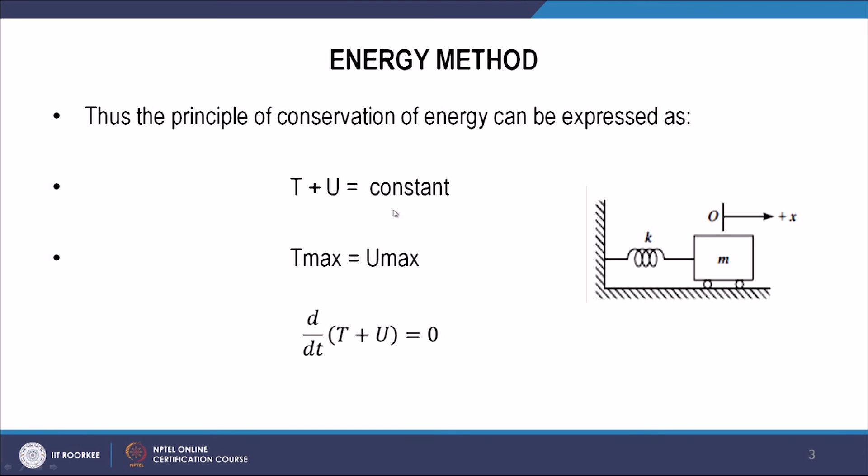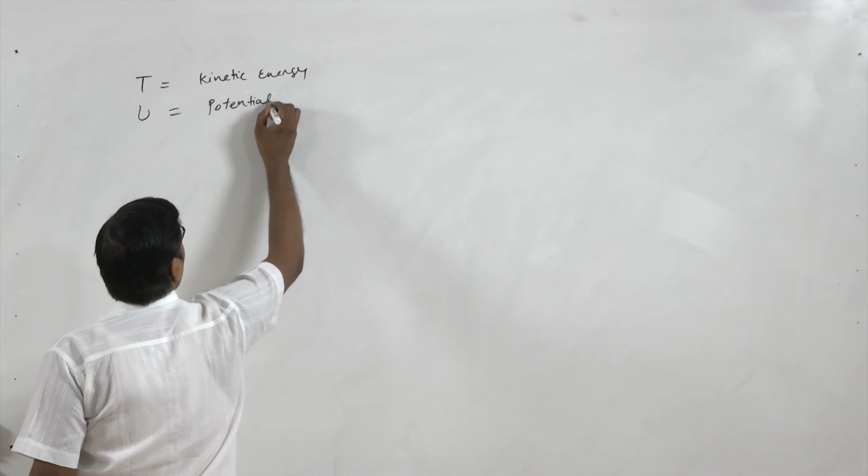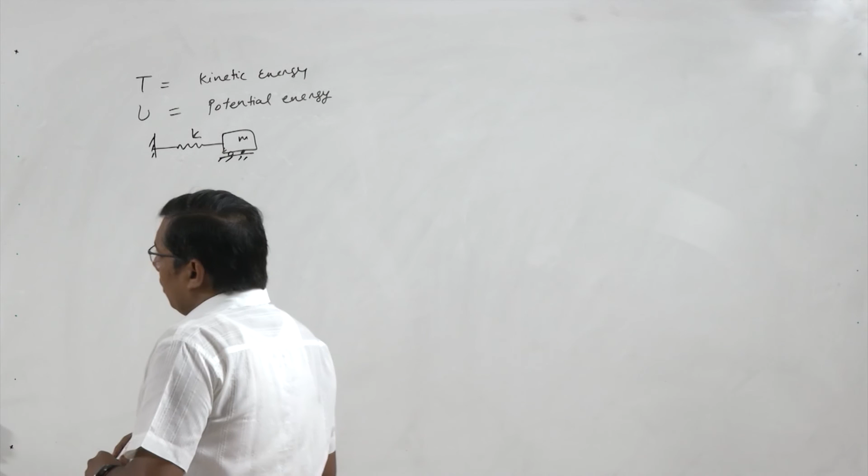Mass has a kinetic energy due to its own velocity, and the spring stores potential energy when it is stretched. So the sum of these two energies is constant for a conservative system. So the principle of conservation of energy we can write as T plus U equal to constant. Here T is the kinetic energy and U is the potential energy. So this is our system. So this total T plus U equal to constant.

Now this T plus U is constant at any instant of time t. Now let's consider two instants of time, 1 and 2. So T1 plus U1 equal to T2 plus U2. So this is our system. This is a pendulum and this pendulum is vibrating. So let's say at any instant of time, here T1, here T2. And this is 1, 2. So T1 plus U1 equal to T2 plus U2.

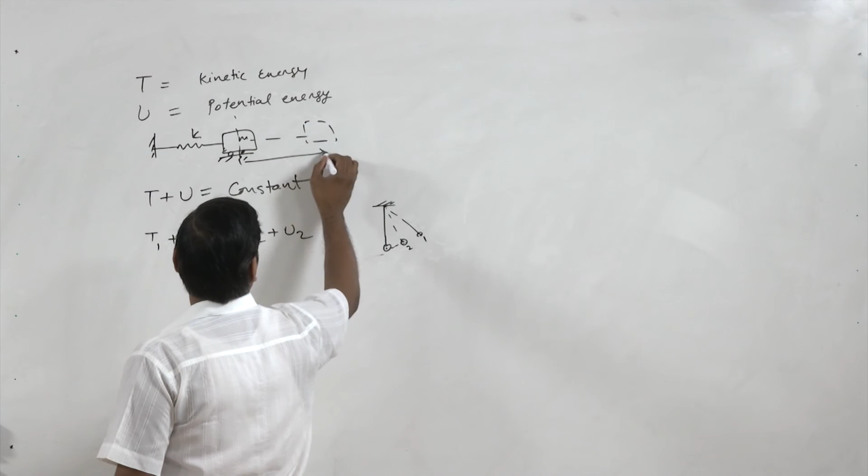Now if we take this example, we see that at this point the potential energy is minimum and kinetic energy is maximum. Similarly, when it is at maximum of its displacement, the kinetic energy is 0 because velocity becomes 0 and potential energy is maximum. Similarly, in this case, from the equilibrium position it goes to its maximum here x. It stops and then it comes back. So here it has only potential energy. So when potential energy is maximum, T is 0, and when T is maximum, its potential energy is 0.

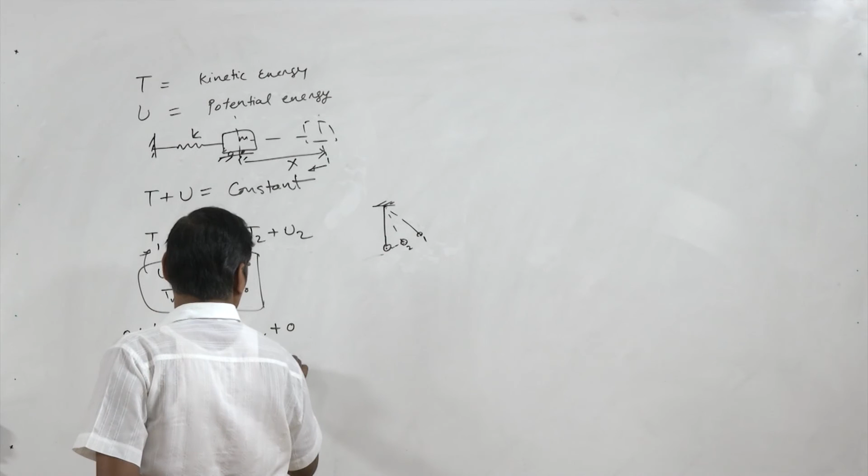So if we put these two conditions in this equation, let's take the first case when U max and T equal to 0. So 0 plus U max equal to the second case, when we have T max plus U is 0. So from here we can write that U max equal to T max. This is called Rayleigh's energy method.

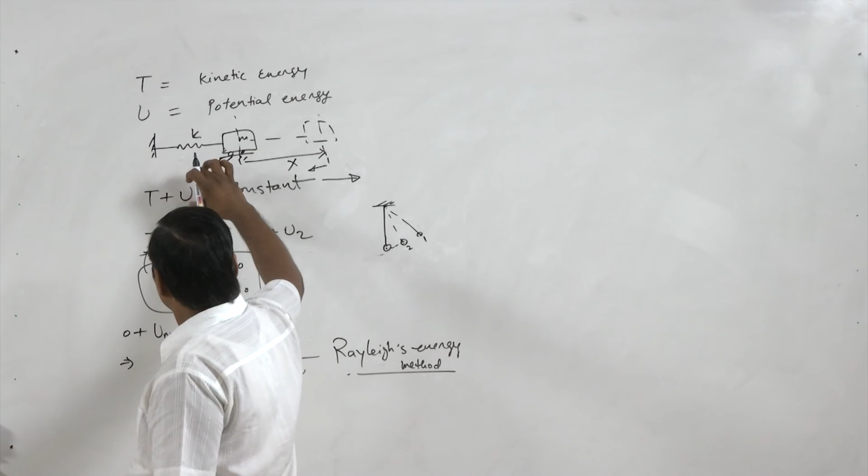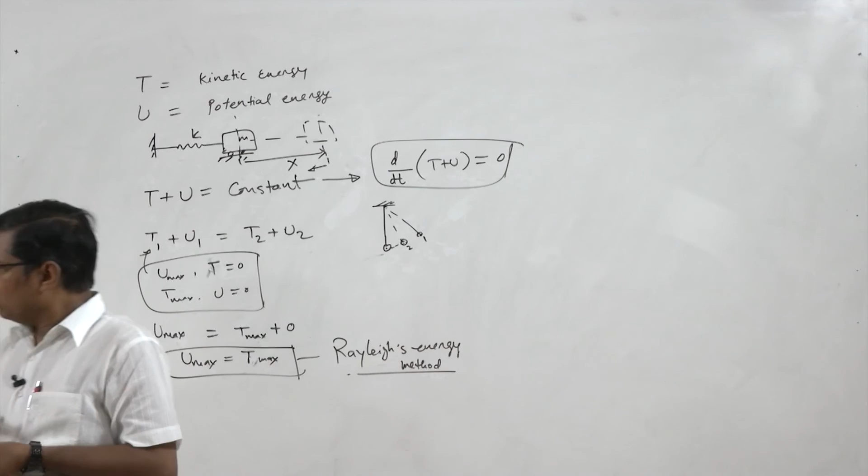Now, in order to get the equation of motion for any system, at any general instant of time we find the total kinetic energy, then total potential energy, and we write this equal to constant. Then we write d by dt of T plus U equal to 0, because it is a constant term, so its derivative with respect to t will be 0. So now we will take one example to find the natural frequency of the system using the energy method.

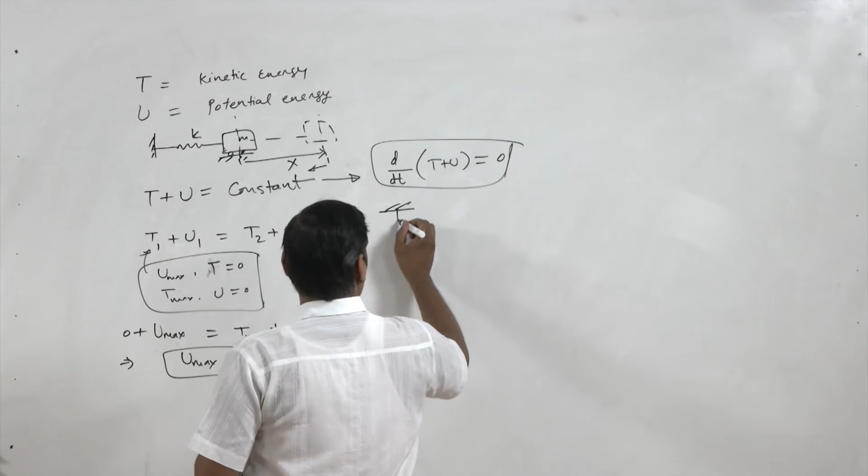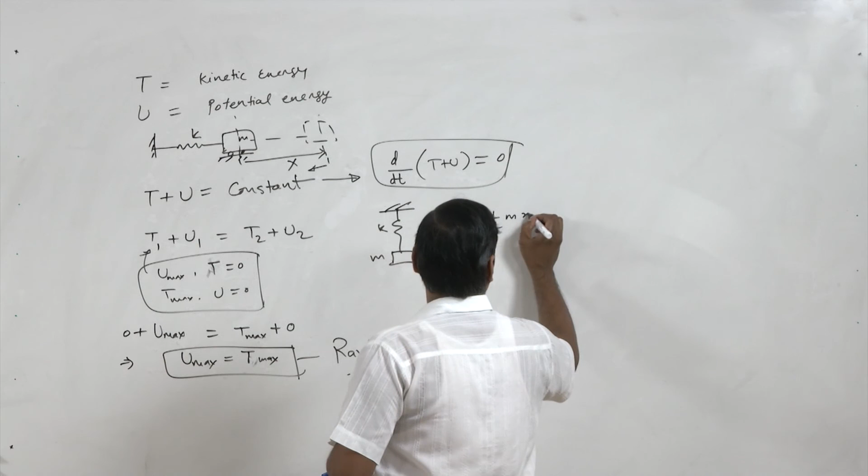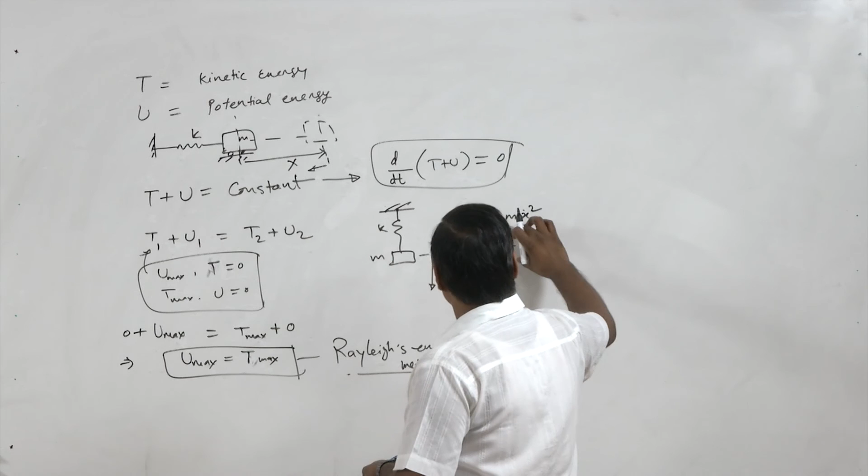Let's take the simple example of a spring mass system. This is m, this is k. So we displace it here, it is x. At this instant the kinetic energy T equal to half m v square, so half m x dot square, and potential energy U equal to half k x square. This is the potential energy stored in the spring at this moment of time, and this is the kinetic energy. Now T plus U equal to constant. So half m x dot square plus half k x square is equal to constant.

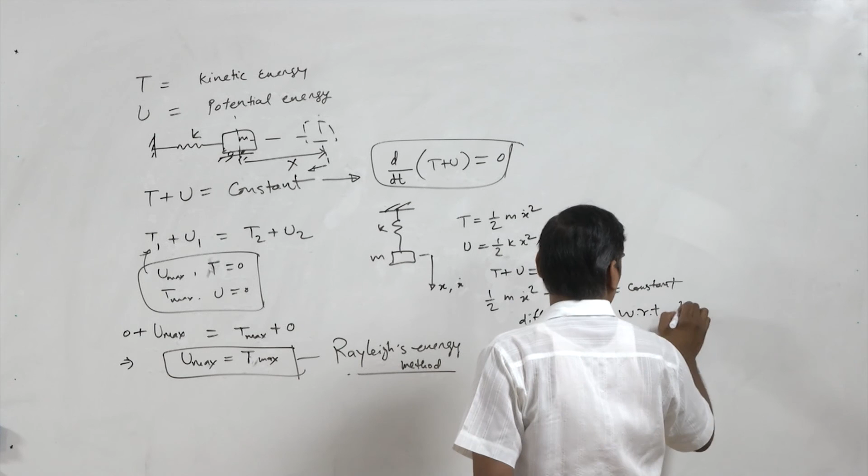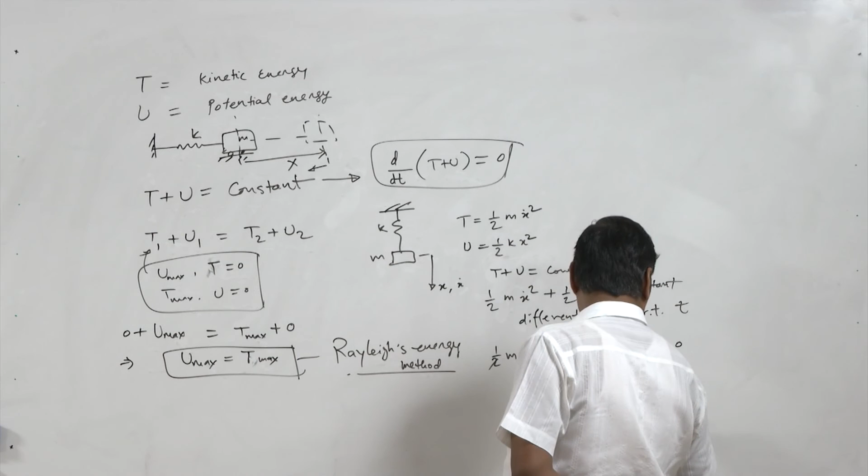Now differentiate with respect to t, the time. So it is half m into 2 x dot into x double dot, plus half k into 2x into x dot, and the constant gives 0. So this will be cancelled out, and we can leave the x dot term. So we will have m x double dot plus k x equal to 0, or x double dot plus k by m x equal to 0, or x double dot plus omega n square x equal to 0. So here we get omega n equal to root k by m.

So by using this energy method, we reached the same equation of motion of this spring mass system that we obtained using Newton's law of motion. This is the simple system. Now let's take another system.

Here we take a spring that is not massless. This spring has mass density, that is mass per unit length. So it has rho equal to mass per unit length, and this is the length L of the spring when it is in the equilibrium or unstretched position. This is M. So the total mass of the spring Ms equal to rho into L.

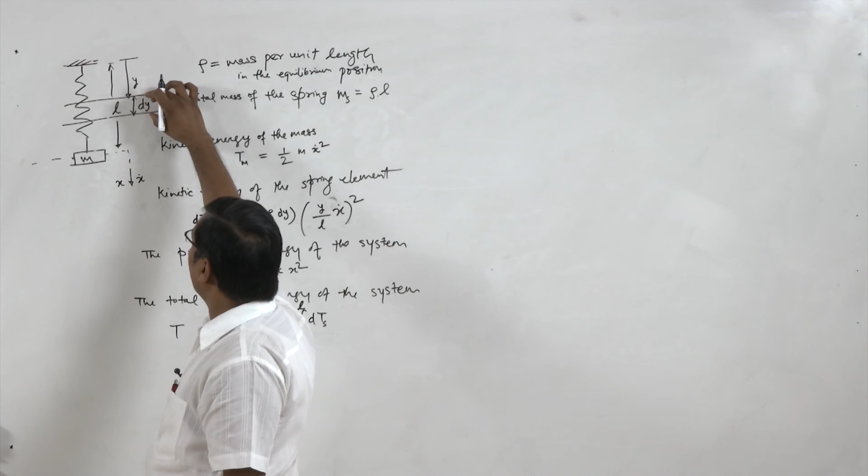So here the total kinetic energy of the system T equal to kinetic energy of the mass Tm plus kinetic energy of the spring, and we can integrate this from 0 to L, because this kinetic energy is only defined for the elementary length dy, and if we want the kinetic energy of the spring, we have to integrate from 0 to L. So we assume here y equal to 0 and y equal to L.

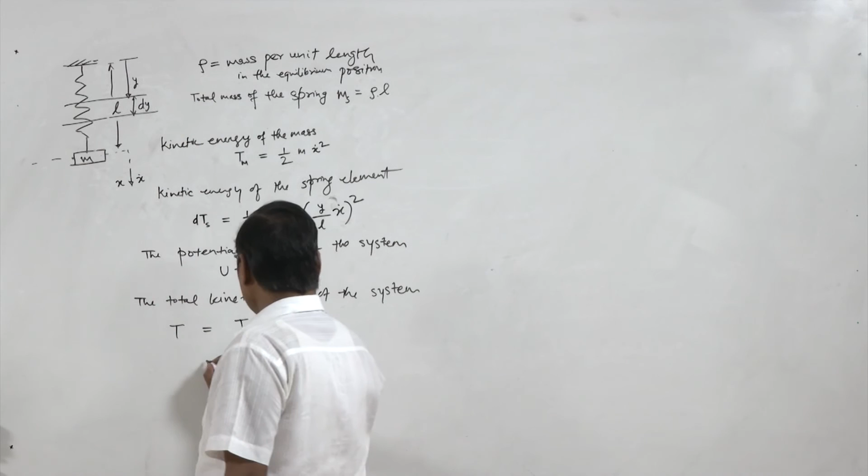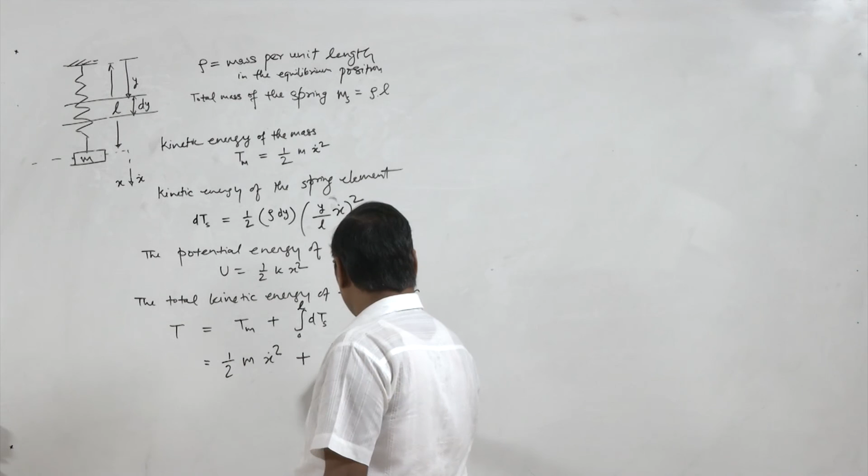So Tm equal to half m x dot square, and here 0 to L dTs. So dTs we can write here half rho dy (y by L x dot) square. Half m x dot square plus half rho by L square x dot square, that can be out because only we have the integral with respect to y, and 0 to L y square dy. Okay, so we have written this y square, and here L square will be out, half rho by L square into x dot square.

Now we will do this integral. So half m x dot square plus half rho by L square x dot square, and this is y cube by 3, and we have limit 0 to L. So we can find T equal to half m x dot square plus half rho by L square x dot square, and this is y cube by 3. So if we put the limit, L cube by 3 minus 0, so it is L cube by 3.

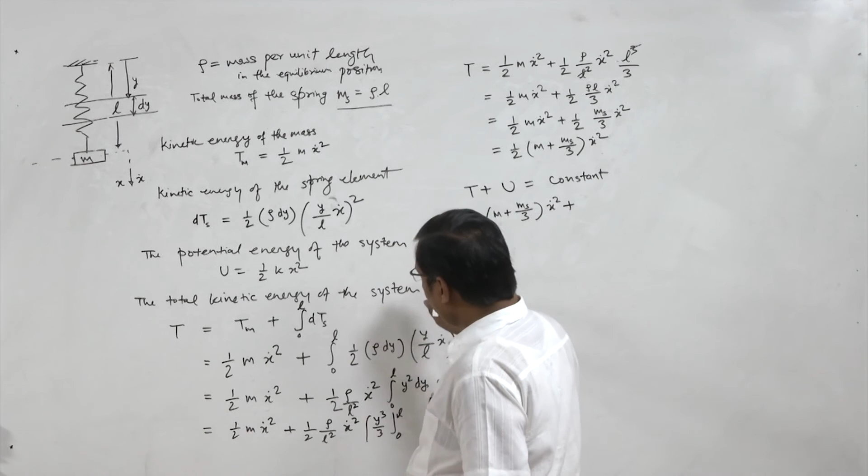Now we will apply the energy method. The energy method says that T plus U equal to constant for any system. So T plus U equal to constant. So here T is half (m plus ms by 3) x dot square plus U is half k x square, equal to constant.

Now we differentiate both sides with respect to time. So here we will have half (m plus ms by 3) into 2 x dot into x double dot plus half k into 2x into x dot equal to 0. So here 2 cancels out. So here (m plus ms by 3) x double dot, because x dot will be gone, plus k x equal to 0.

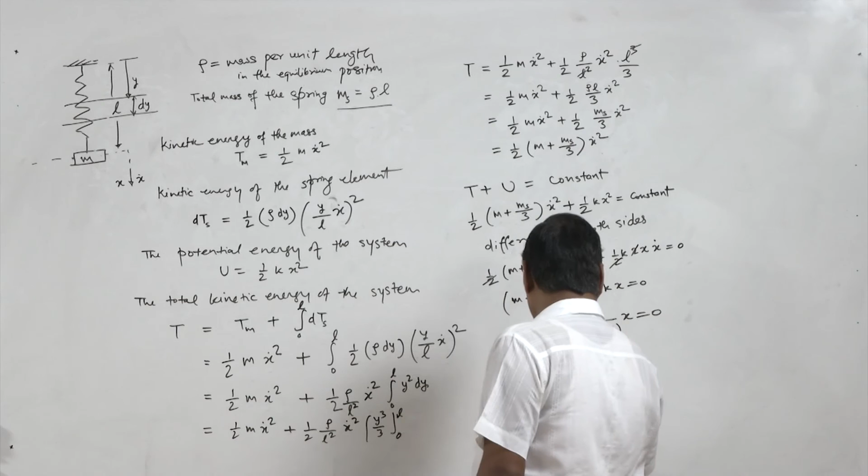Now x double dot plus k by (m plus ms by 3) into x equal to 0. So now we can compare it with x double dot plus omega n square x equal to 0. So we can find the natural frequency omega n equal to root of k by (m plus ms by 3).

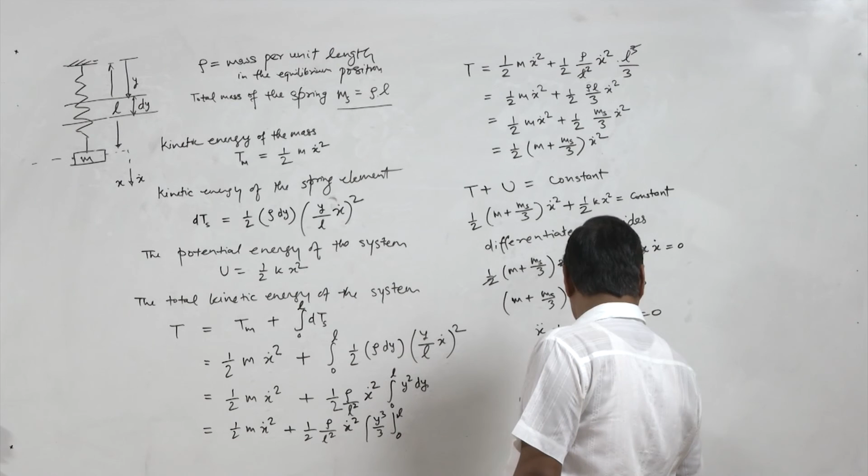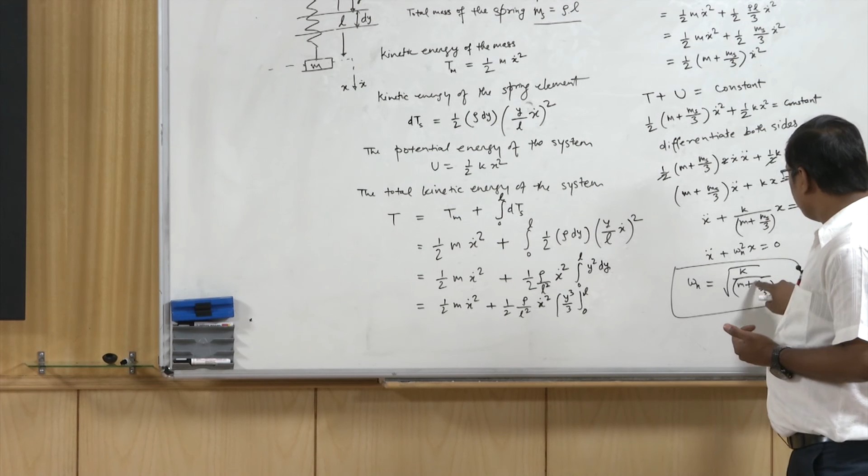So this is the final expression for the natural frequency of a spring mass system with a spring having mass with mass density rho. So what we see, if we have a massless spring, so ms equal to 0, that's why we get the natural frequency omega n equal to root k by m. But if we have some spring having mass ms, then 1/3 of the mass will be accounted to calculate the natural frequency of the system.

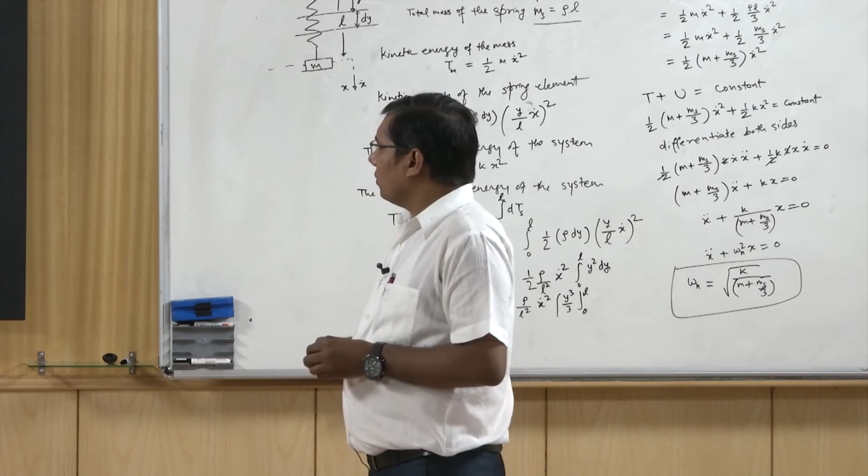Okay, now we will take another example of a system to use this energy method to find the natural frequency. So let's take another example.

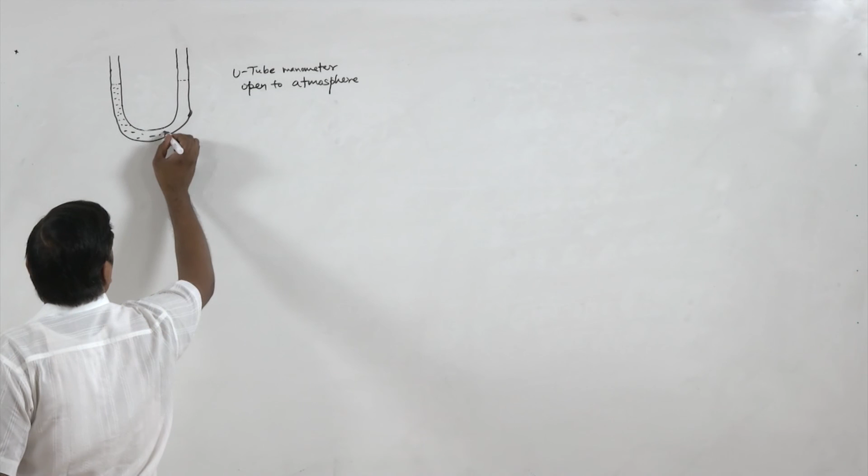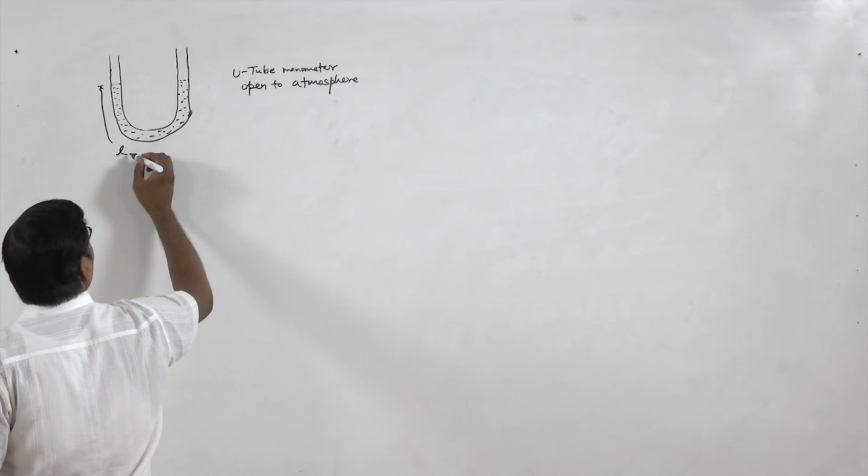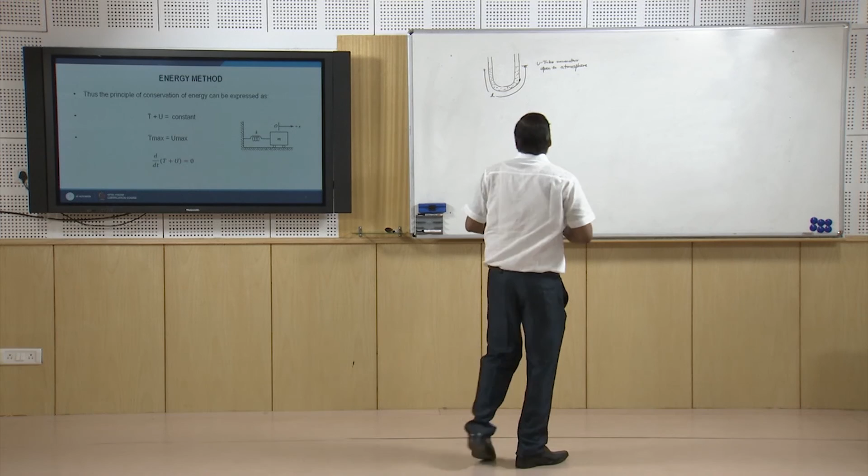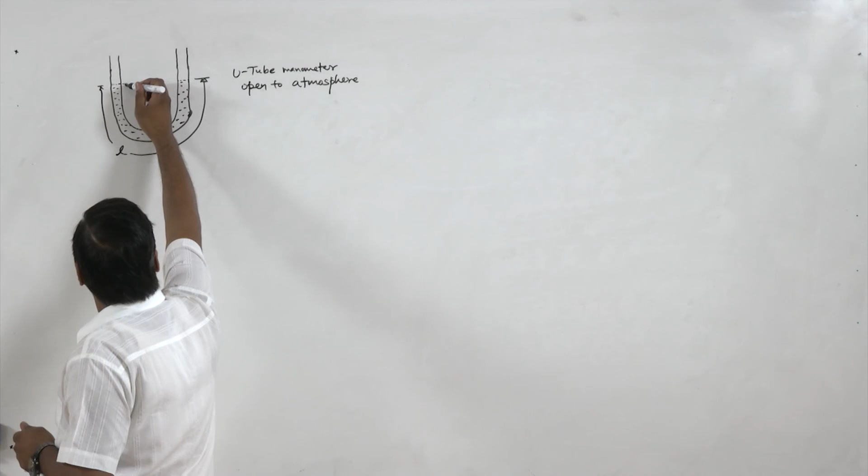So here we have a U-tube manometer that is open to atmosphere, and there is a liquid column of length L here. Now if we want to disturb this liquid column by pressing it, if we press it by X here, okay,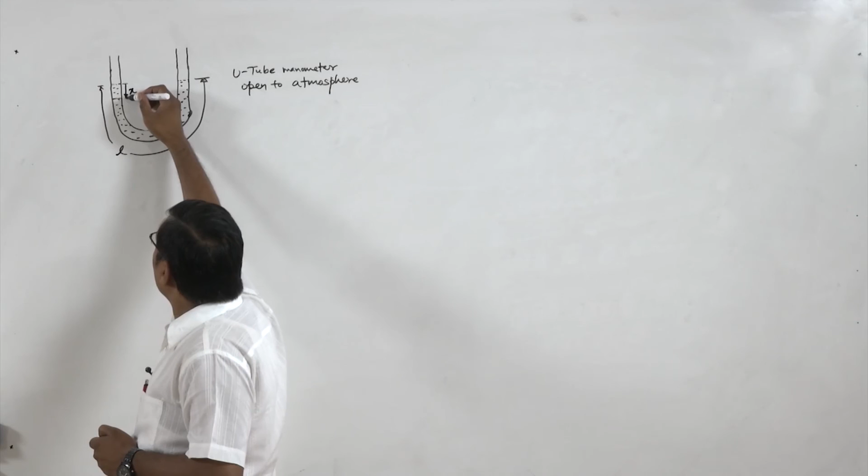so we are pressing here and then we want to see the free vibration of this liquid column, and let's assume that at a certain instant of time the liquid column is here at X, and because of the law of conservation of mass, the same mass will be raised here. If it is X here, it will be X here, so this will rise by X. Okay,

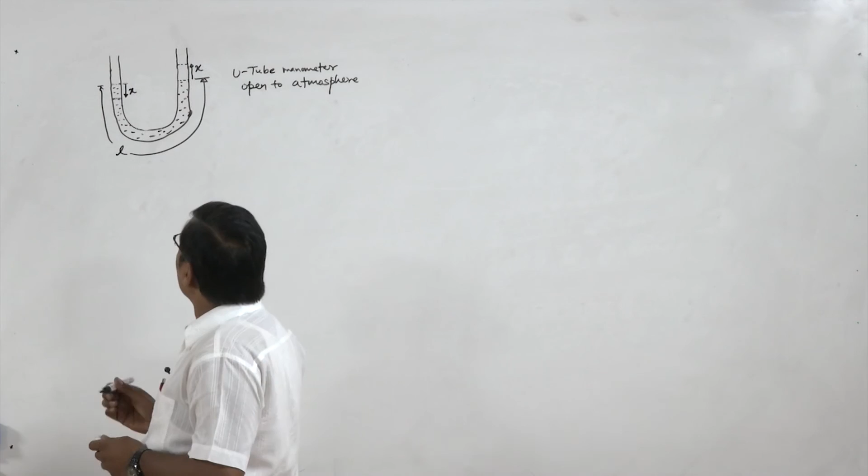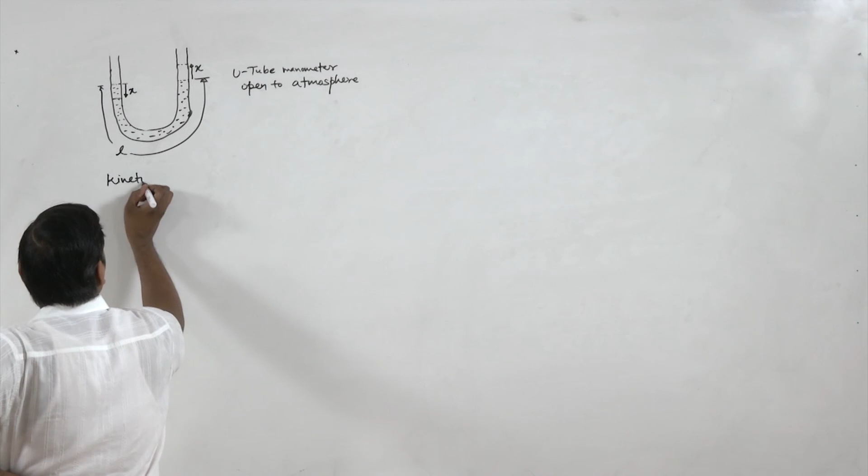so now we have to apply the energy method to find the time period or natural frequency of oscillations of this liquid column. So first let's have the kinetic energy of the system, and let's say rho is the density of the liquid. And A is the area of the section of the tube. Okay.

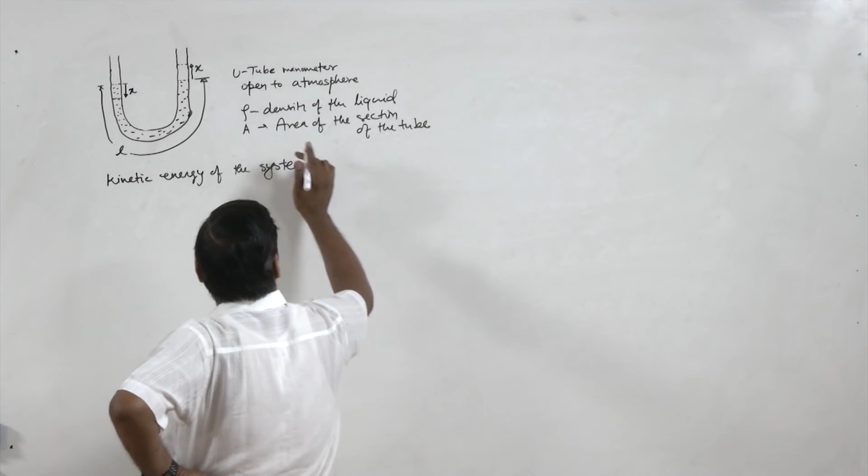So kinetic energy of the system is half into, so each point of this column will have the same velocity x dot at that moment, so the total mass, half into rho into A into L into x dot square. So rho is the density of the liquid, multiplied with the volume, that is area into L, so the total mass into x dot square. So this is the kinetic energy.

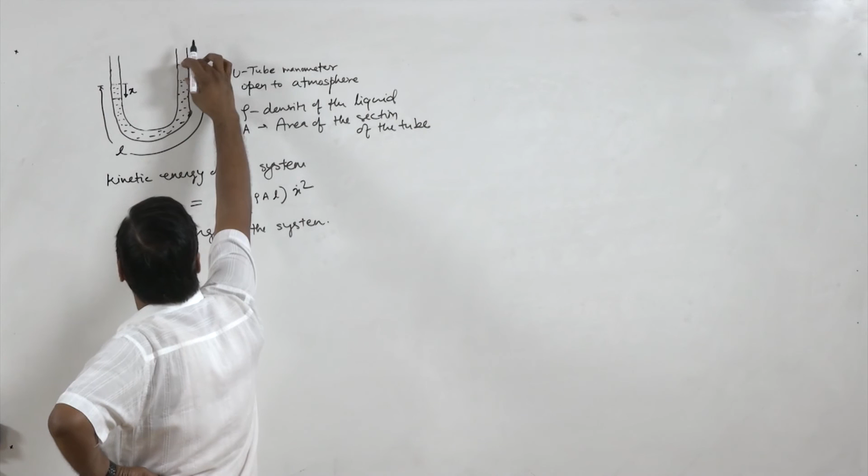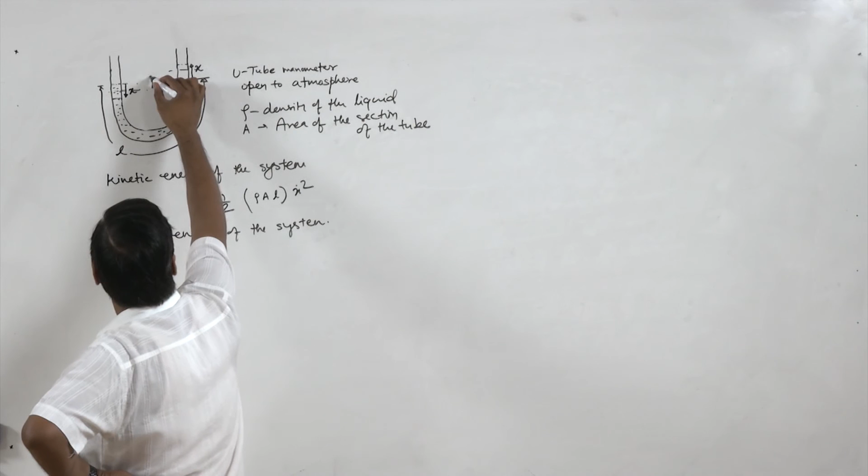Now the potential energy of the system. So it is like we have this mass kept here, and if this is the Cg of this mass, at x by 2, and here it is raised, so this mass is raised by x. So that mass is rho times A into x, so rho Ax, this mass is raised against gravity, so mg into x. So this is the potential energy.

Now we have this kinetic energy and potential energy. So this is T. So T plus U equal to constant. So T is half rho A L x dot square, and this is rho A g x square, equal to constant. Now let's differentiate this with respect to time. So half rho A L into 2 x dot x double dot plus rho A g 2 x x dot equal to 0.

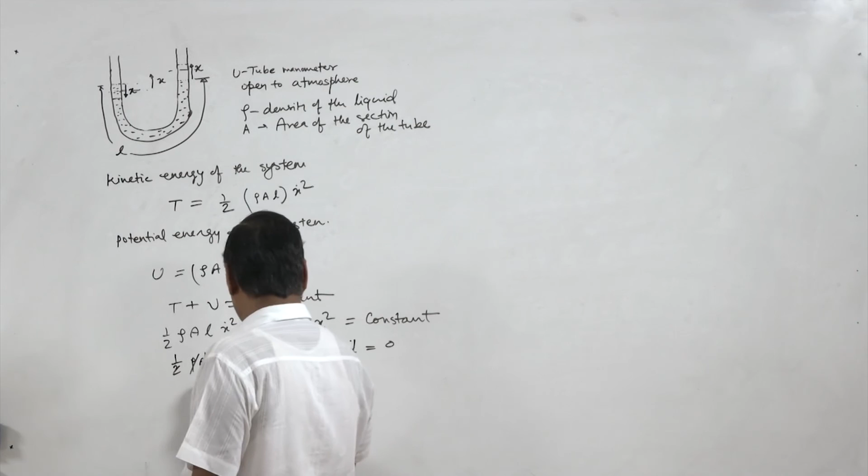So rho cancels out, A cancels out, x dot cancels out, the 2 cancels out, so here is L x double dot plus 2gx equal to 0. So we can write x double dot plus 2g by L x equal to 0. Now we compare this, x double dot plus 2g by L x equal to 0, with x double dot plus omega n square x equal to 0.

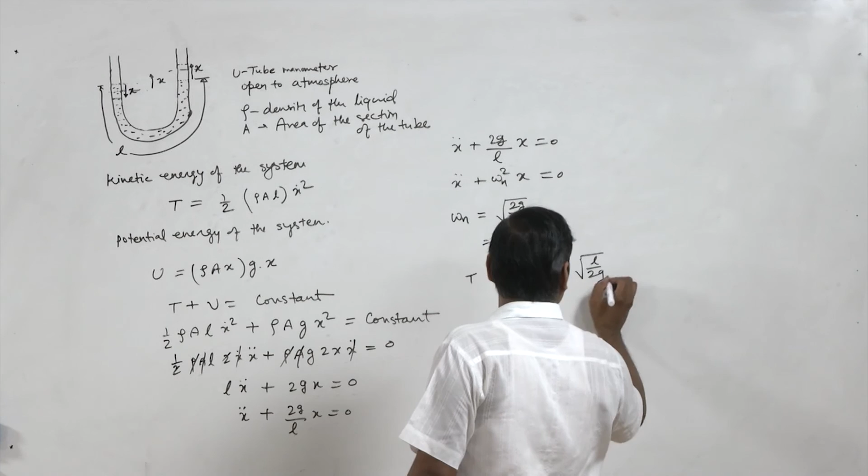So we find that omega n equal to under root 2g by L, or omega n equal to 2 pi by time period T. So T equal to 2 pi upon omega n, that is 2 pi root L by 2g. So this is the time period of the oscillation.

So here we see that by using the energy method, we have to compute first the kinetic energy of the system. Kinetic energy depends on the mass, so if there is mass in the system, we have to consider all of it, and the kinetic energy of the system means the sum over the components of this system. For example, in the previous case we had the spring and the mass, both having mass, so we considered the kinetic energy of both.

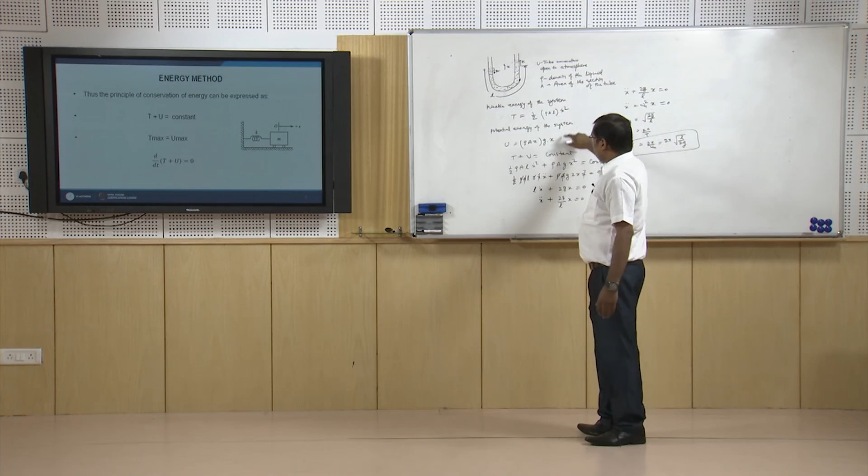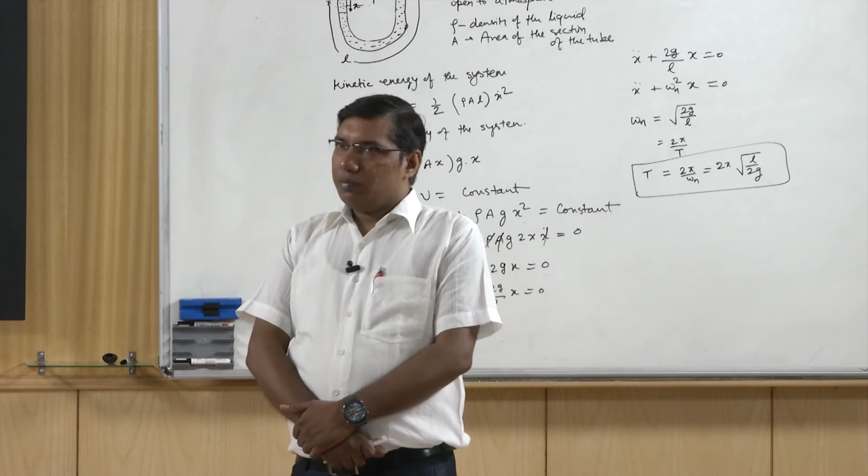In this case only the liquid column has mass, so we got only one component of the kinetic energy. So we find the kinetic energy of the system and then the potential energy of the system. We set T plus U equal to constant, we differentiate it, and we get the equation of motion, and we compare it with x double dot plus omega n square x equal to 0 to find the natural frequency of the system.